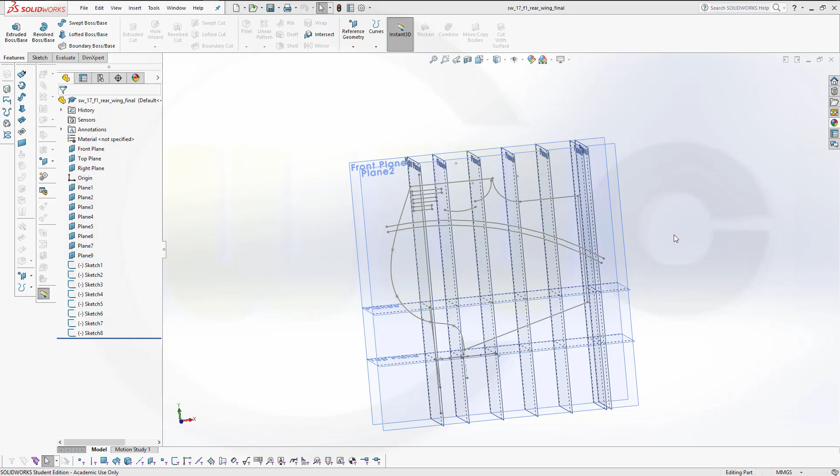Hi, welcome to the second part of the F1 rear wing exercise in SolidWorks. I've done all my sketches, so I can now proceed with the surfaces.

So let's start with an extruded surface with this. No, where's my sketch? There it is. That's the line. Maybe in this direction. 750, and the second direction maybe 200. And okay, let's trim this.

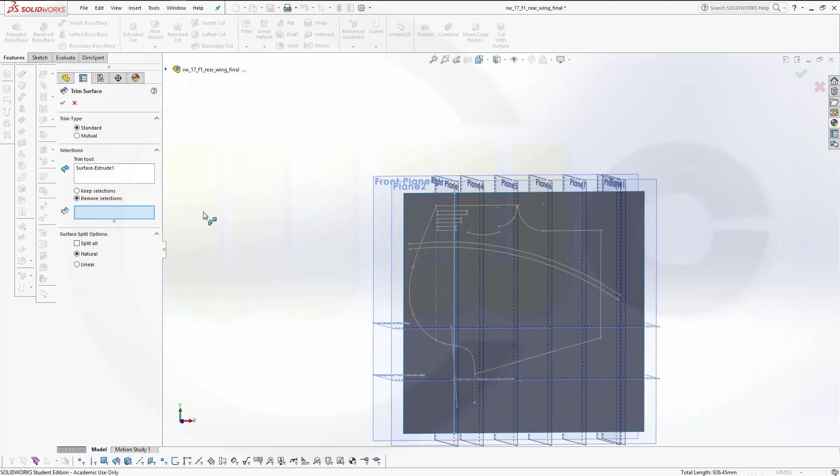So go for surface trim. I want to trim not with this one but with that line, so I will have to go for contour selection with this one, and I want to remove that part here.

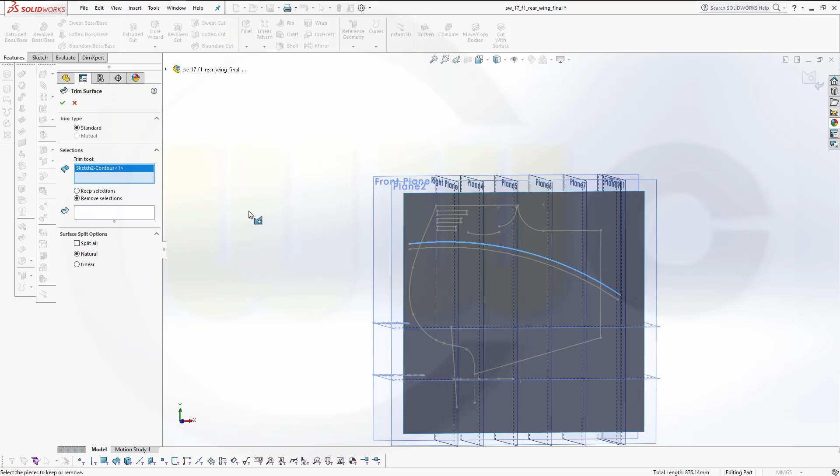So what's happening right now? Okay, let's try once more. I want to trim with that trim tool. So I go for contour selection and select this one. Okay, switch over here and remove that one.

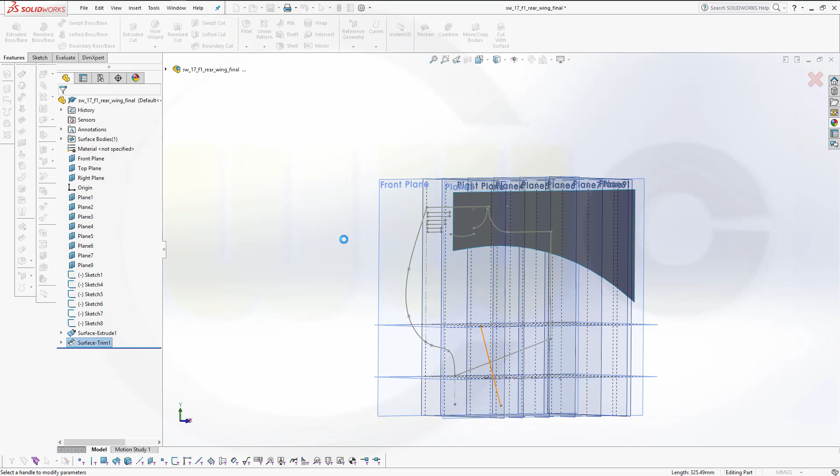Okay, next I want to extrude this. Not extend, sorry. Extrude this one. And in the second direction it should be again 200. Confirm. Nice.

Now I want to make a loft between those two surfaces. So go for a lofted one from this edge. It should go all around. So go for selection manager and make it tangent, yes, confirm, and this edge and make it tangent and tangent.

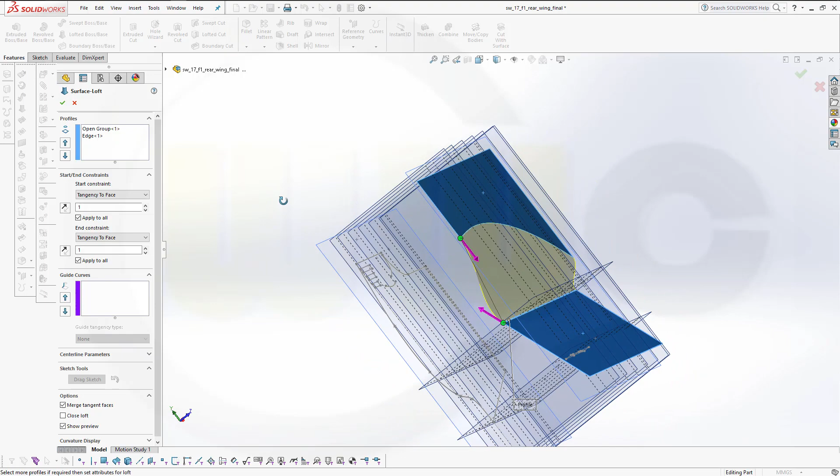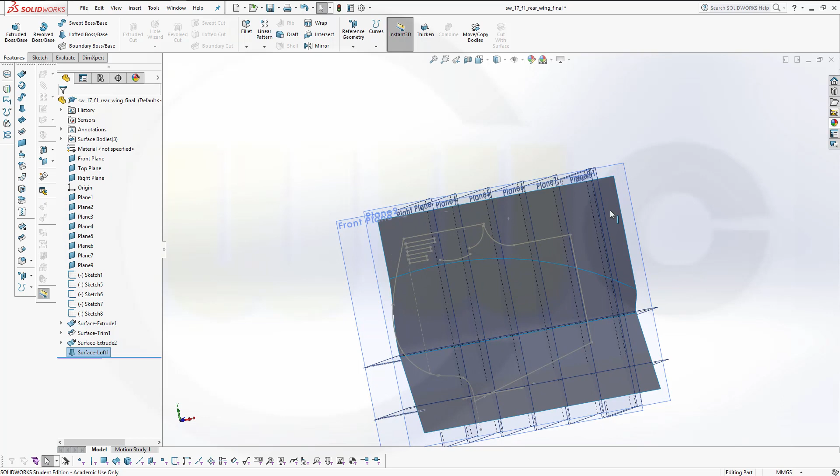And of course you could change those, but I will leave it as it is. Okay. Now let's extrude those two sketches. Extrude this one. Make it 750, that's okay. Confirm and make a linear pattern.

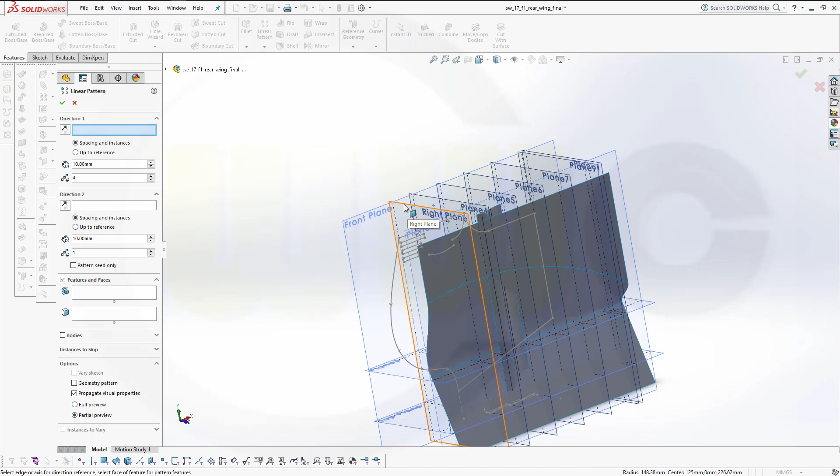Direction, if possible, with a plane, but I think that doesn't work. Let's see, maybe it works. 1, 3, 5, 4 instances, yes, and I want to pattern this one. Looks good. Confirm. Then another extruded surface with that sketch right here. Again 750. Now I can trim.

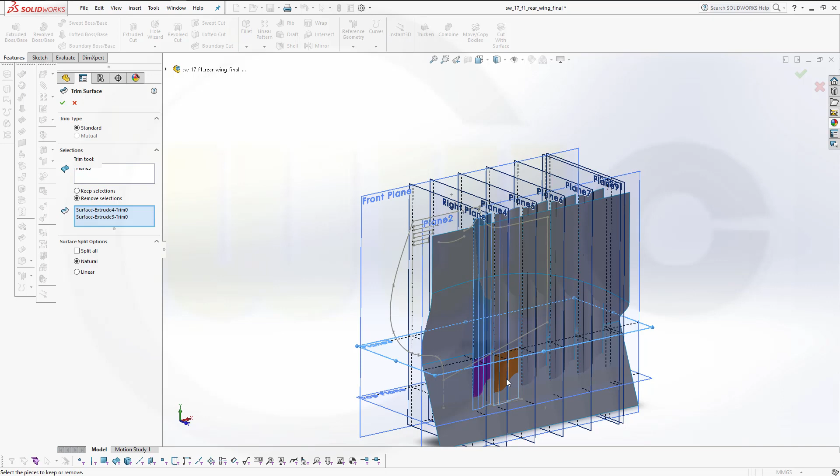I want to trim with that plane right here, and I want to remove this, that, this, that, and this. And okay. Then another trim with a sketch curve, and that would be sketch 2, which I used for the first trim. Make it visible.

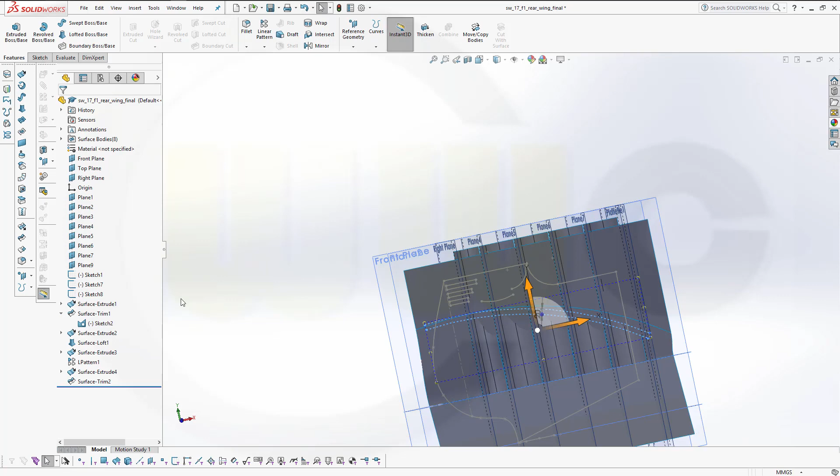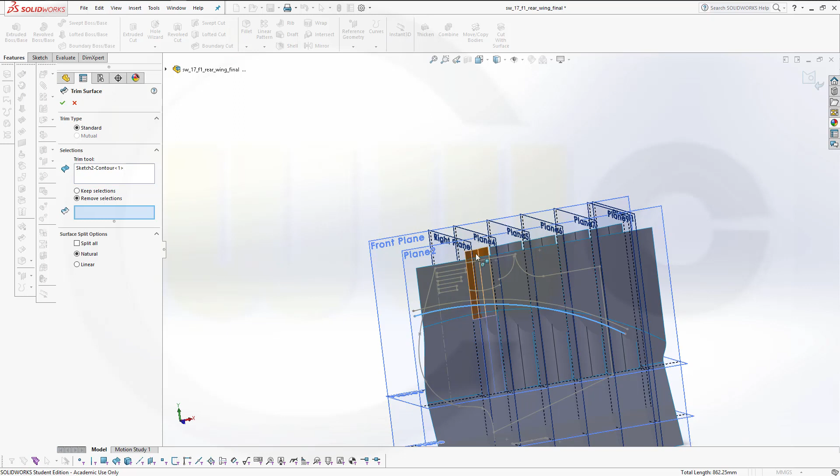And I want to trim those fins. So go for another trim. Now select contour selection, this contour, switch over here, and I want to remove this, that, this, that, and this. Okay, great.

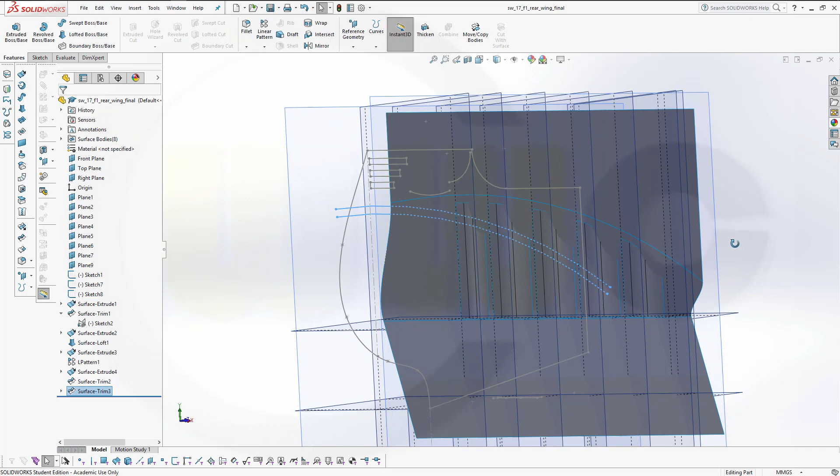Now I have to split this surface, that surface, and this one, and therefore I will need split lines. So let's go for split lines. Split line, I want to split. Let me take a look at first. No, that's with that plane, and I want to split this surface. It's not a split, it's just a line on that surface.

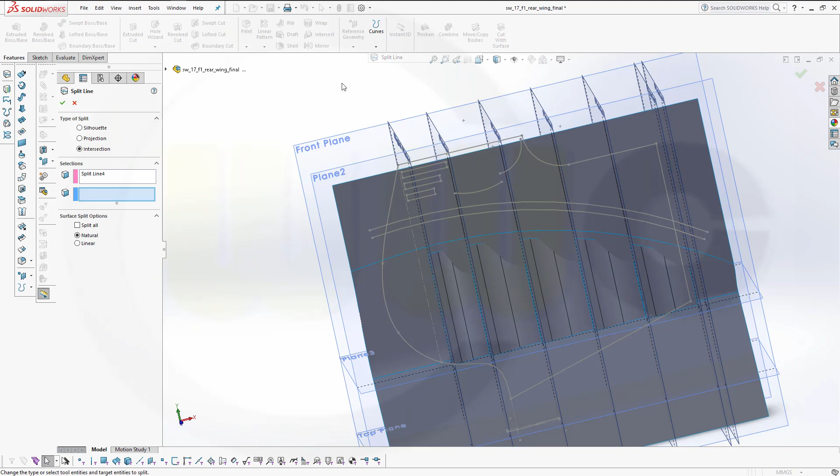Then again another split line with this plane and that remaining surface. Confirm. Another split line with this plane and that surface. Another split line with this one and that surface. And another split line with this plane and that surface. I might need some more, but for the moment I will do it with these.

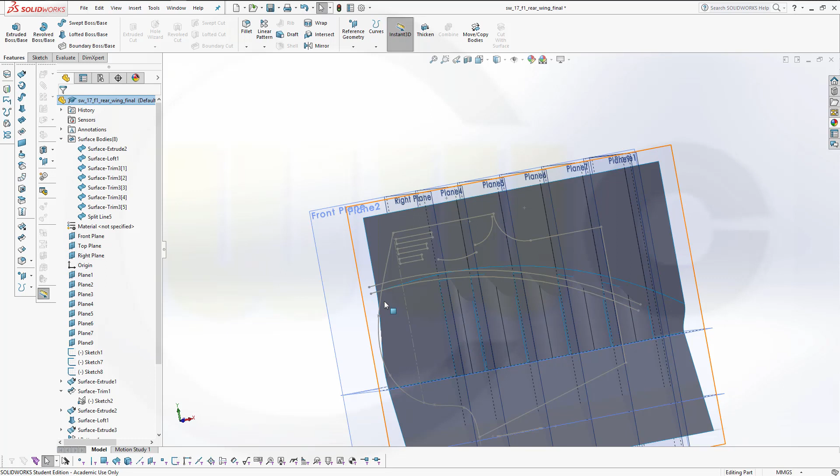So let's hide for the moment that one, and that is surface loft. That loft. I want to make lofts between these fins and that part. So go for lofted surface, go for selection manager, select that curve, make it continuous in tangency, confirm, and select that edge right here and make it tangent to face and tangent to face, confirm.

Then another lofted surface, go for selection manager, select this edge right here, make it continuous in tangency, confirm, and select that edge, make it tangent in start and end. So this didn't work. Why? Somehow I cancelled that command. Let's do it once more.

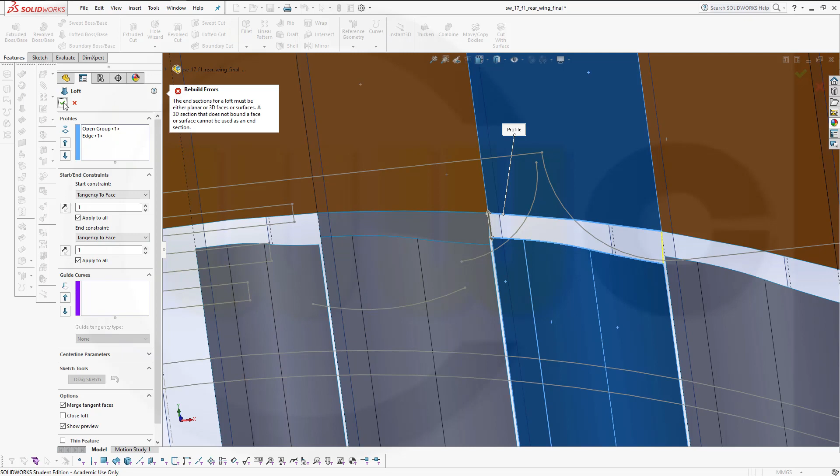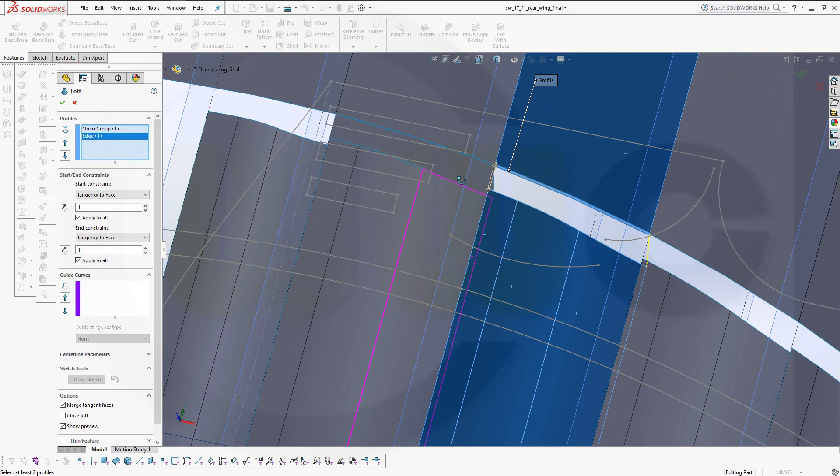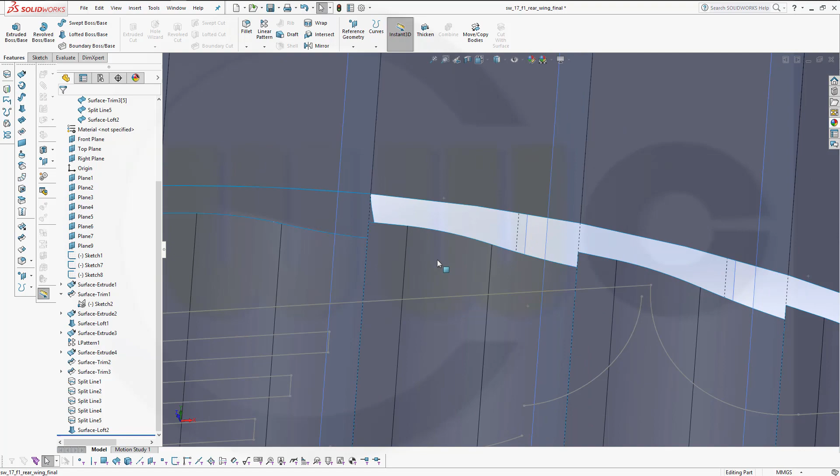Select. Maybe zoom in. This one. Tangent. Confirm. This one. Go for tangency and tangency. Confirm. So what's happening here? That's the open group. Yes. That's the edge. Yes. And seems those doesn't work. Crazy. Let's try once more.

Go for lofted surface. Let's start with that edge. Go for selection manager and select that edge and make it tangent. Confirm. This looks good. So why doesn't it work? Go for tangency to face, and go for tangency to face. Now it works. That's strange.

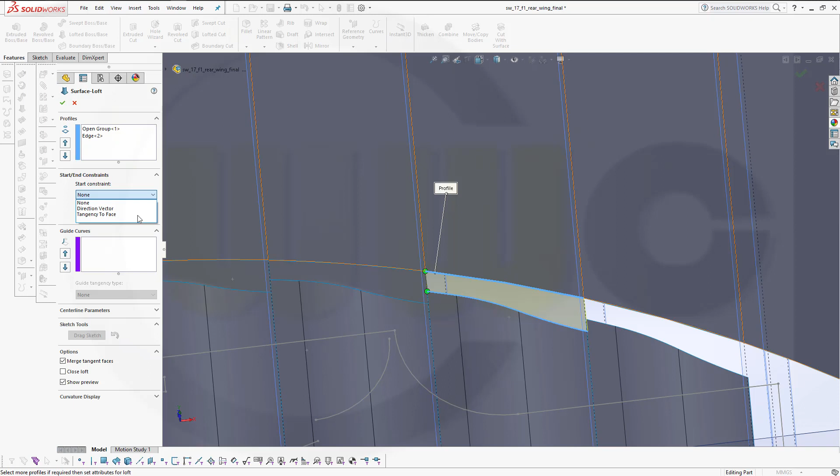Another lofted surface, edge. No, this was no good. So select selection manager, select this one, make it tangent. Okay, confirm. Then select that edge. Okay. Go for tangency to face, and confirm. Great.

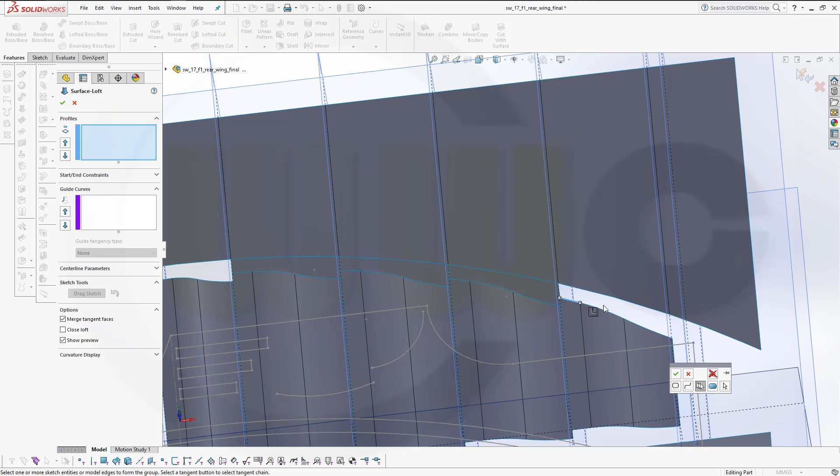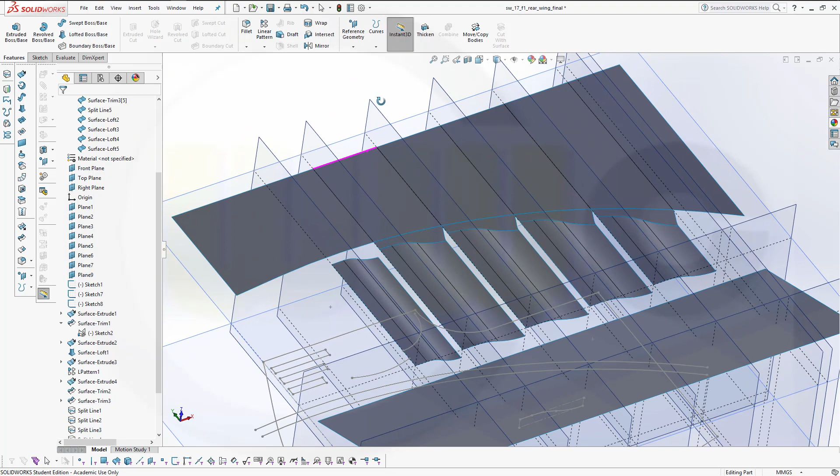Next one, selection manager. Yeah, that's really annoying. Okay, selection manager, tangent, confirm, select that edge, go for tangency and confirm. So that's okay. Now for the other parts.

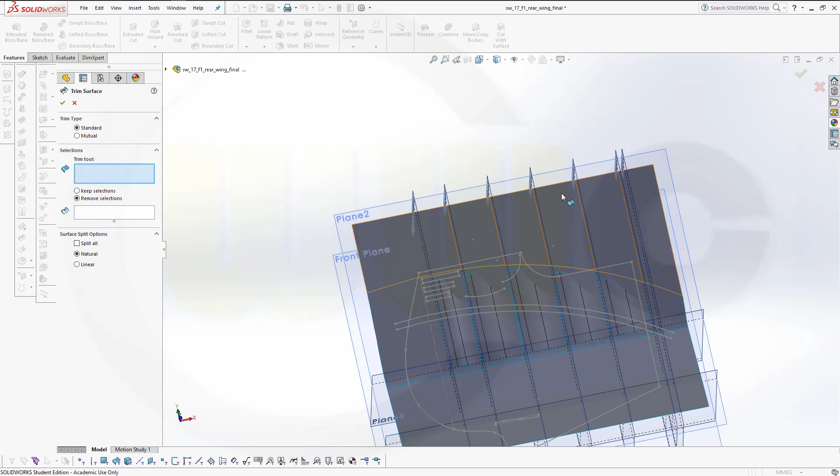So let's show that hidden surface, this one, and I want to trim it with that plane, this one. So go for surface trim. I want to trim with that plane, and I want to remove this side, and okay.

Now I want to extend this one, so go for an extension with that edge in that direction, 200mm, that's okay, and confirm. Yeah, and I want to use that curve. Can I extract that somehow with a composite curve? Would be nice. Let's try.

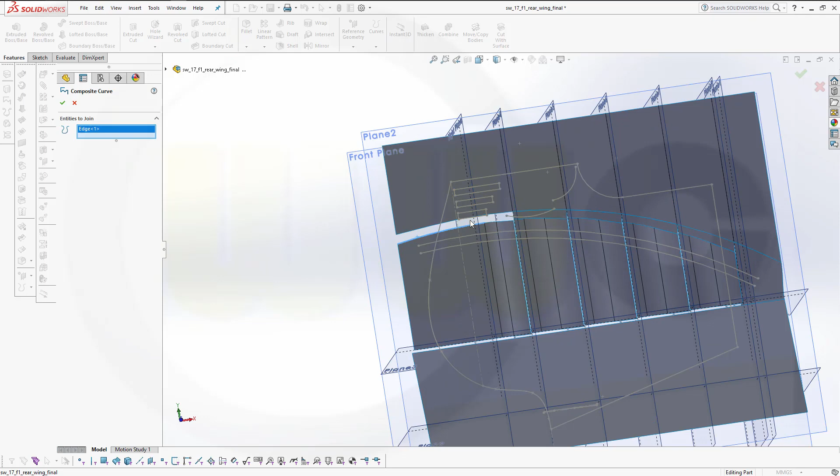Seems to be possible. Let's confirm, and we will see if we can use that for a loft. So I could hide that surface here. Yeah, and let's try to make a loft between those two. So go for a lofted surface, selection manager, and select this one and that one, confirm, and then select that curve.

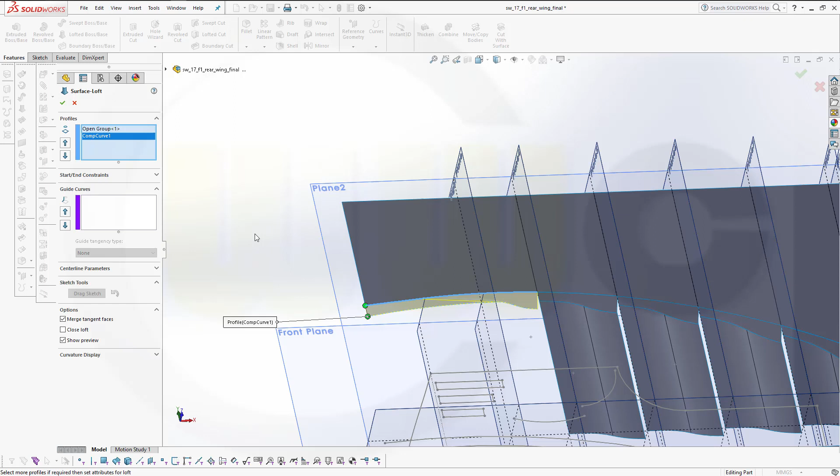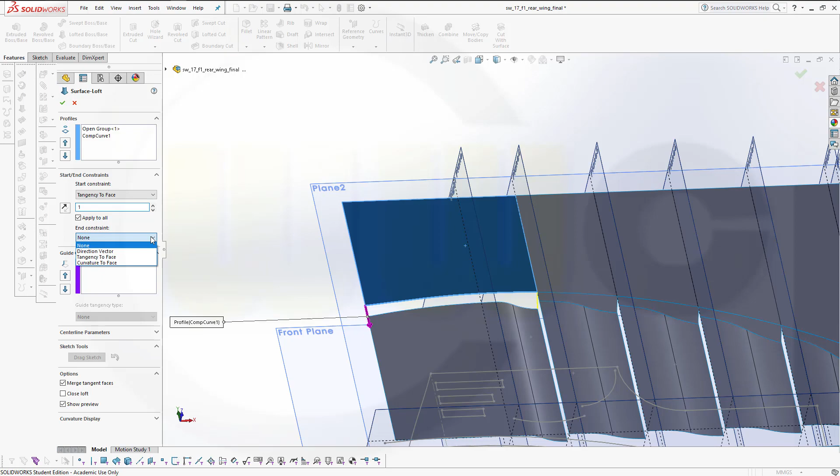That's okay, but I need it to be tangent to that hidden surface. So let's see if we can switch it back on. This one, yeah, and I need it, no sorry, need it to be tangent to face and tangent to the second one. But this doesn't look good. See, that's no good. So I might try it in a different way.

Split those two and then try to make it here. So go for a split line with that plane and that surface, and another split line between that plane and this surface. Okay, yeah, of course I forgot to switch. That's it.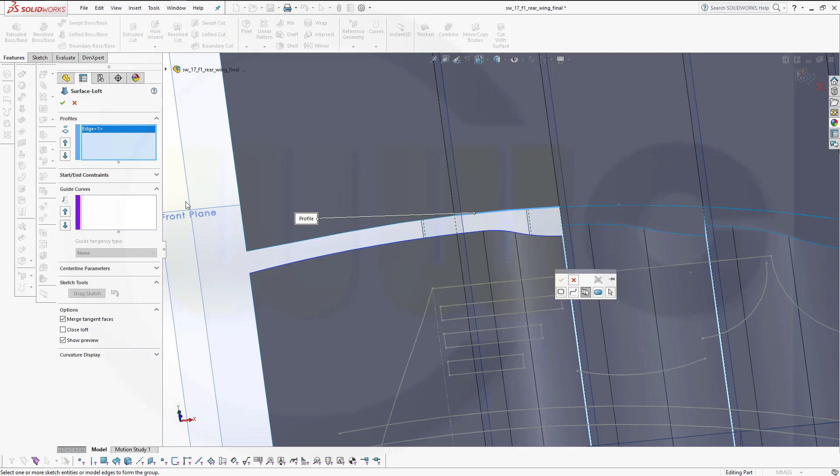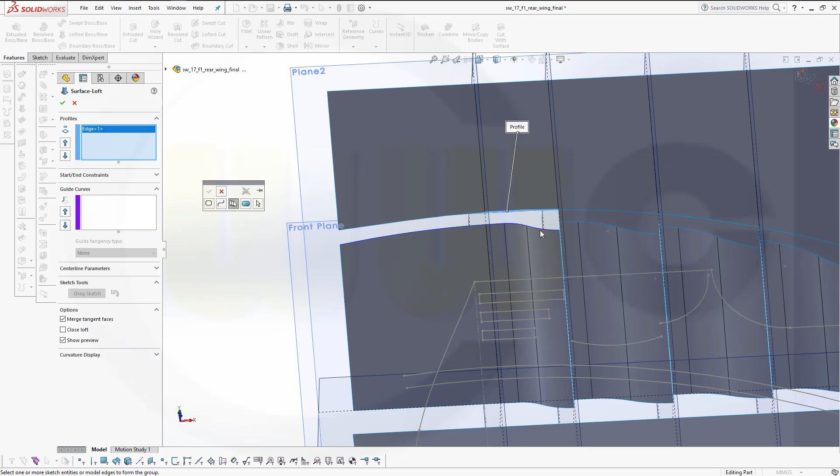Okay, let's try to make a loft here. So go for a lofted surface from this edge to... switch. So that's again somehow crazy. Okay, let's try once more. Lofted surface. I want to use this edge right here, and then go for the selection manager, and I can't select that. See, that's crazy. So try to select other. No, not possible.

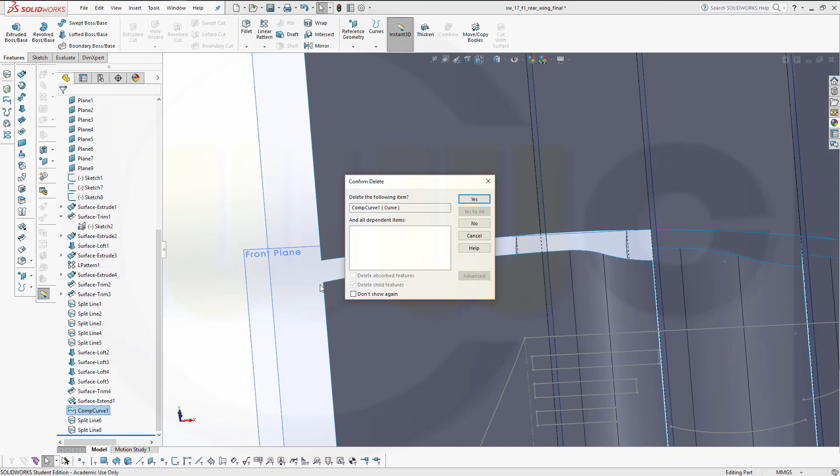This is really kind of annoying, because now that composite curve is somehow in the way, so let's delete this one. Okay, now I should be able to select it. So go for another lofted surface, select that edge, right click selection manager. Now I'm able. That's really crazy. Okay, so that's okay. Now go for start end, tangency to face and tangency to face, and confirm.

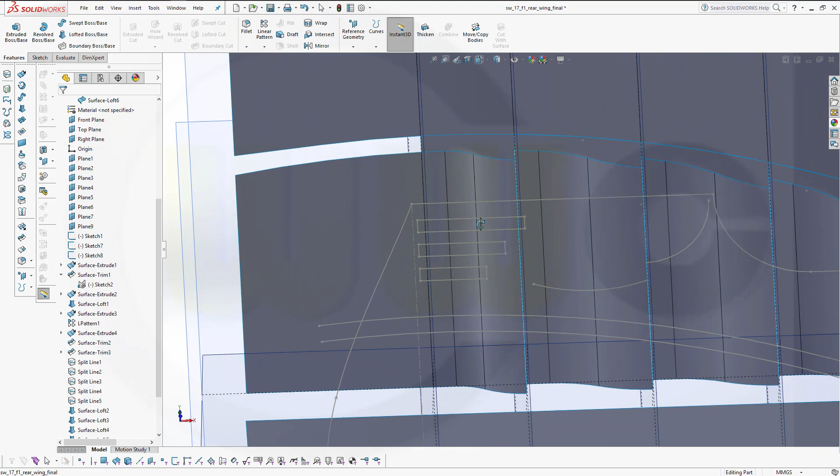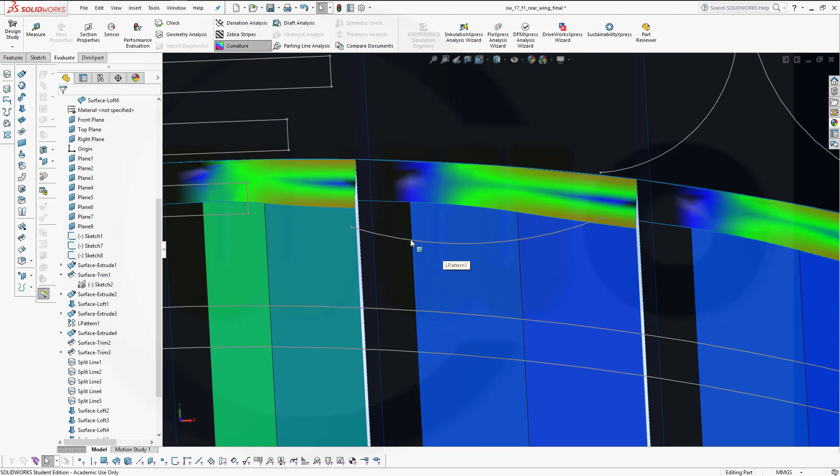Now that need not to be so. Yeah, I could do it even different. First trim and then make that loft, but this loft should be better than the one before. So let's go to evaluate and just check the curvature. So yeah, it looks very similar to those. So that's not as good as it could be, but I will leave it like that.

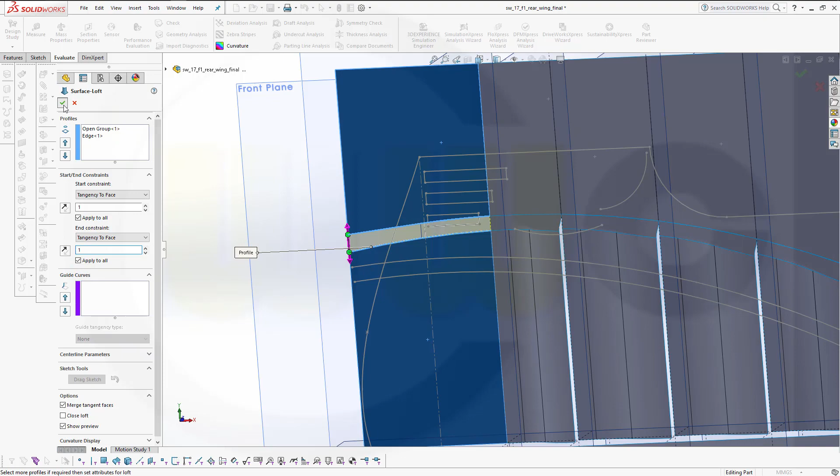Okay, now I could go for another extrude. I could trim this and I could go for a loft. It doesn't really matter, so I'll go for a lofted surface. That's faster, and I want to select that group right here, and then this edge, make it tangent. You could go for another extrude as well. Okay, so now I could knit those together and then trim.

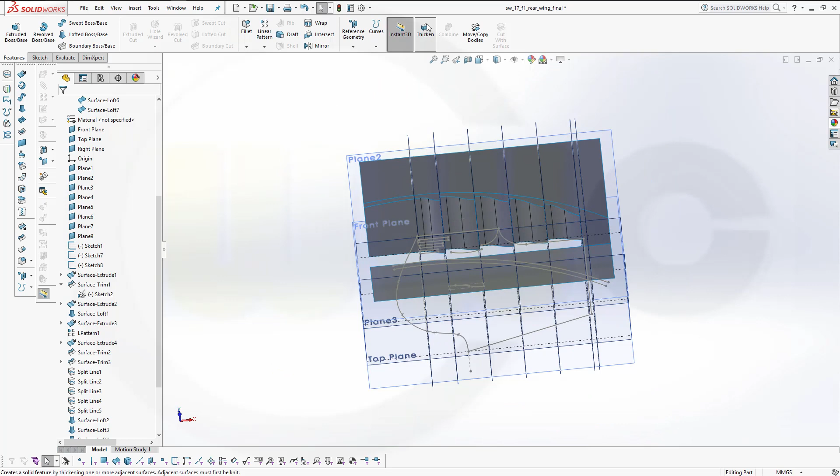There might be a problem in thickening this, so let's check some of those if we can thicken them. Let's check this surface, not this one, but that one, just to see if it's possible. 5 in both directions, possible, not? Yes, okay.

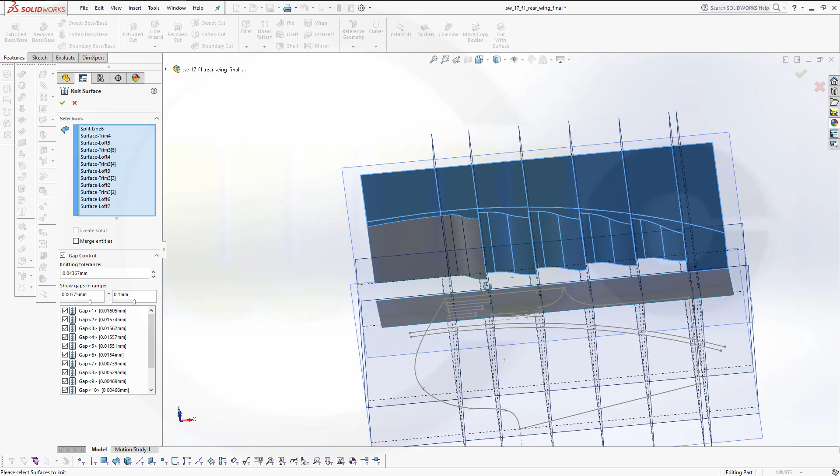And let's knit this together. So this one, that one, this one, that one, and so on, and oh, sorry. Of course, there has to be one from here over there. So let's see if we can hide that. No, we can't. So I will trim that one. So go for trim.

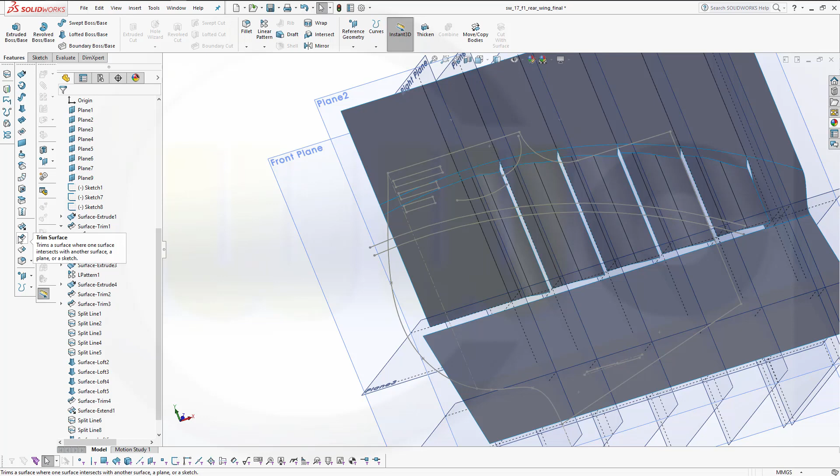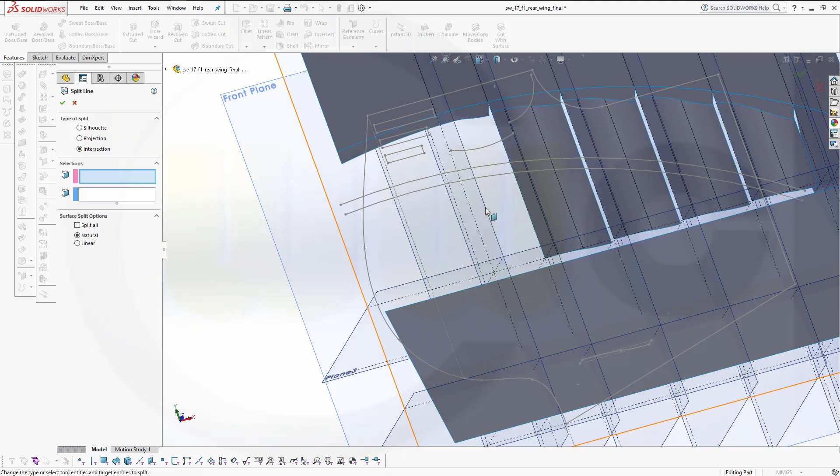Oh yeah, sorry. Sometimes I get a little bit lost. Like, now I want to have one from here up there. That's the point, from this one up to there, and then I need a split line here. So go for a split line with this one and that one. Confirm. And now I can then do a loft from that edge up to selection manager. This one like that, okay.

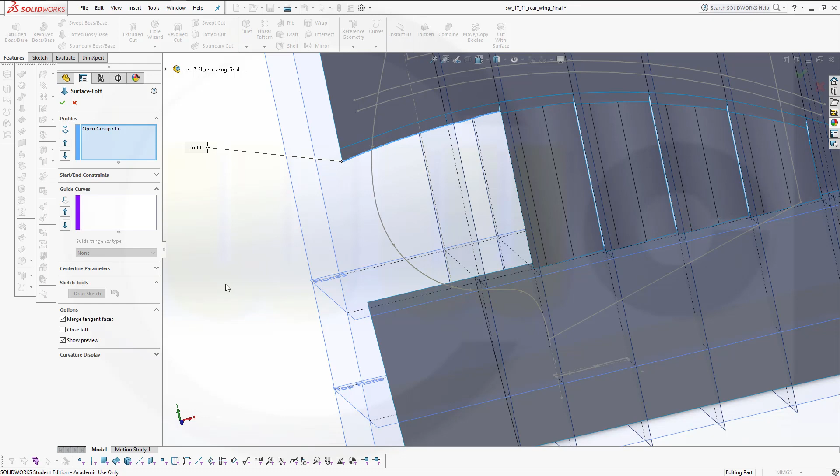And oh, that's the wrong one. It should go up here to that. So delete this and go for selection manager, this edge and that edge. No, that's the wrong one, just this one. So I think I made my split line wrong. That split line should be not this one, of course. So go for edit and change that plane and make it that plane. That's more like it. Confirm.

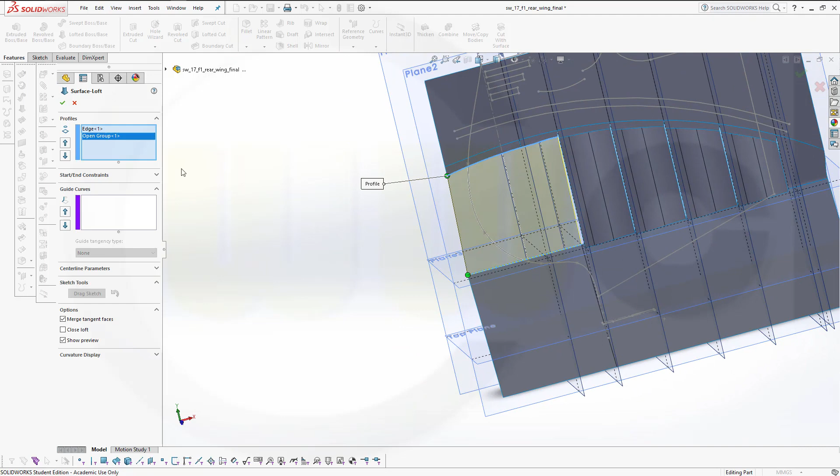And now I'm able to do that loft from this edge. Yes, selection manager up to that one. Confirm. That's more like it. Now make it tangent to both faces and confirm. Yeah.

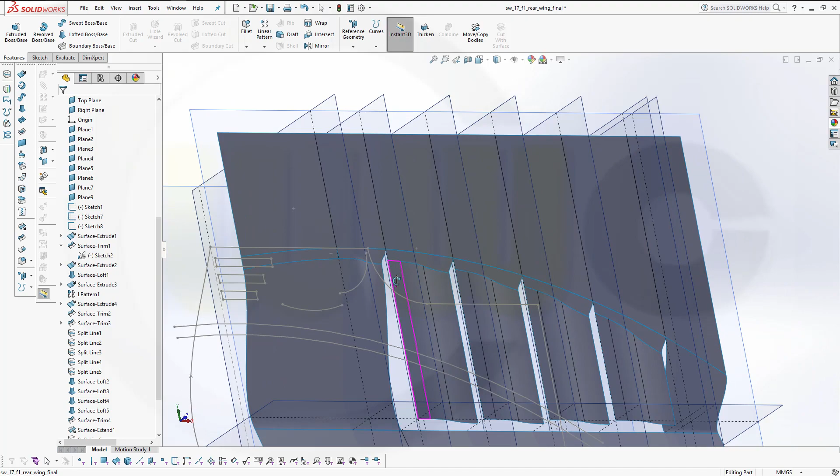Now let's knit those. Knit 1, 2, 3, 4, 5, 6, 7, 8, 9, 10, 11. This one and that one. That's it. Confirm.

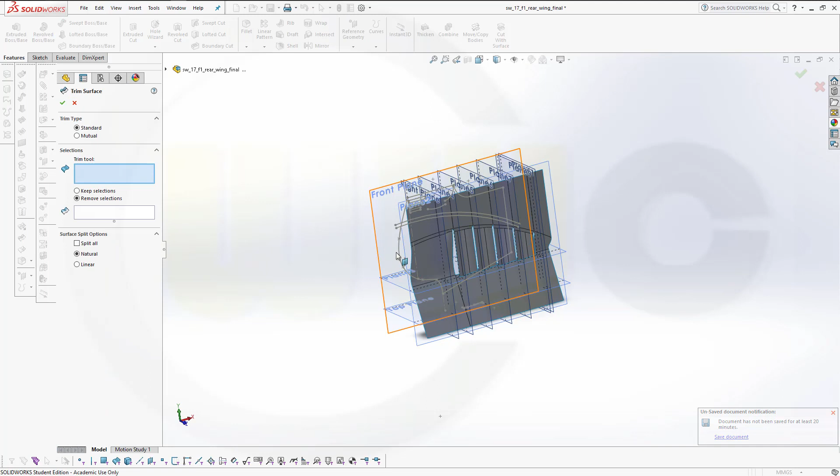Let's trim. Go for trim. I want to trim with that sketch right here, and I want to remove the face on the outside.

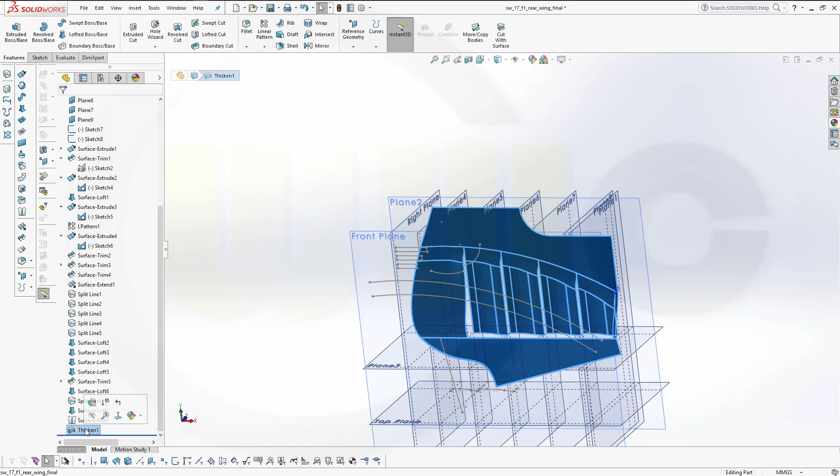So in order to thicken that surface, I had to do some changes. Now I've got a thickened surface with 4 mm, but I've changed some things. First I changed that distance. That was in sketch 2. Where is it? Sketch 2. That's the first trim here. I changed the distance to 50.

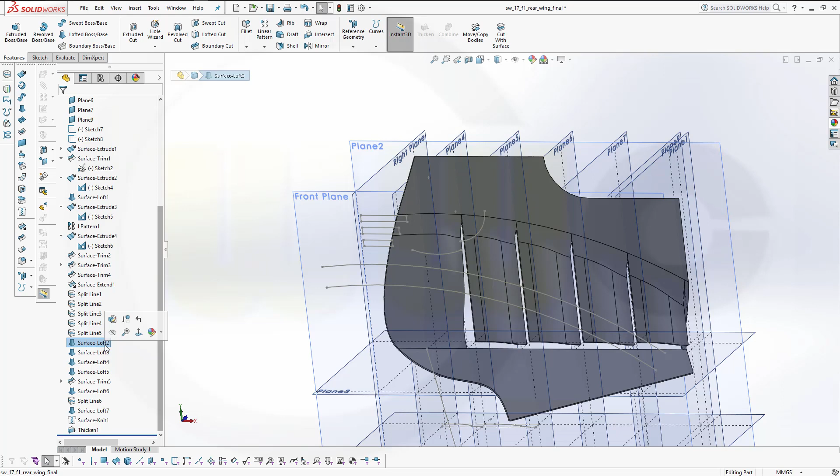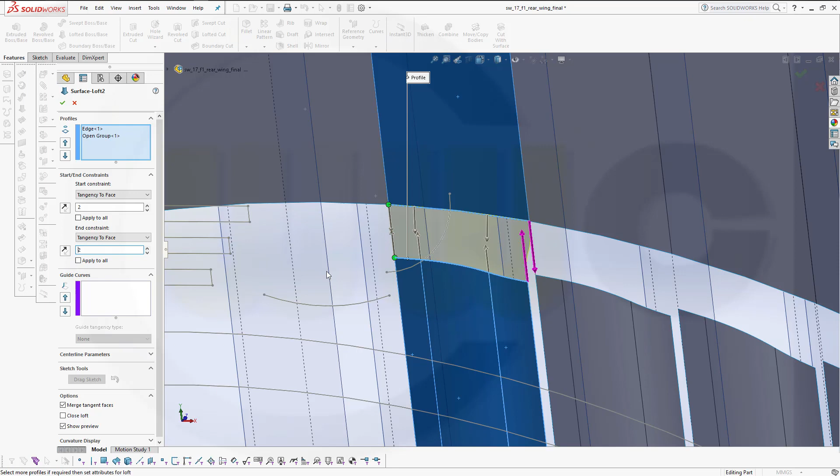And then I made some adjustments to all those lofts here. I will show it with the first one. I disabled apply to all, and then you're able to edit that tension at 4 points, and I changed it here at this end to 2, and for this one as well to 2, and I did all those changes identical here, here and there, and I've also changed the tension here and there, and then I'm able to thicken it with 4 mm thickness.

So let's move on. Now I want to make extruded surfaces with this one, and this should go up to that plane. Confirm. Then the next one

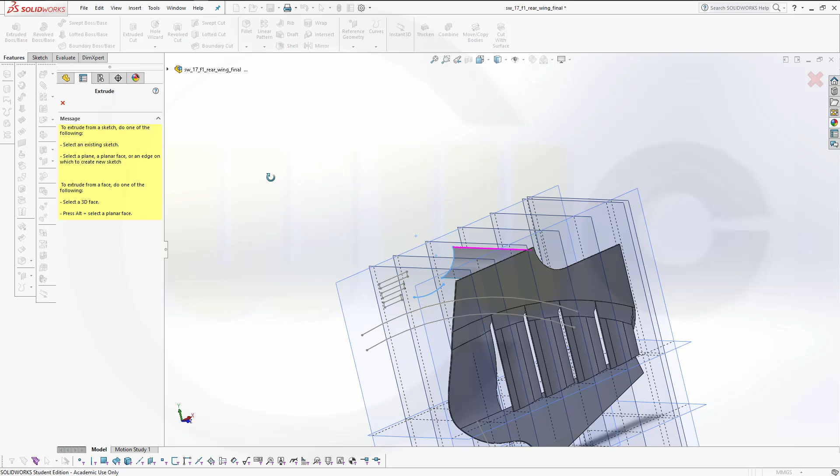with this arc again up to the surface, in this case a plane. Confirm. Then I can thicken that, thicken this one with 4 mm.

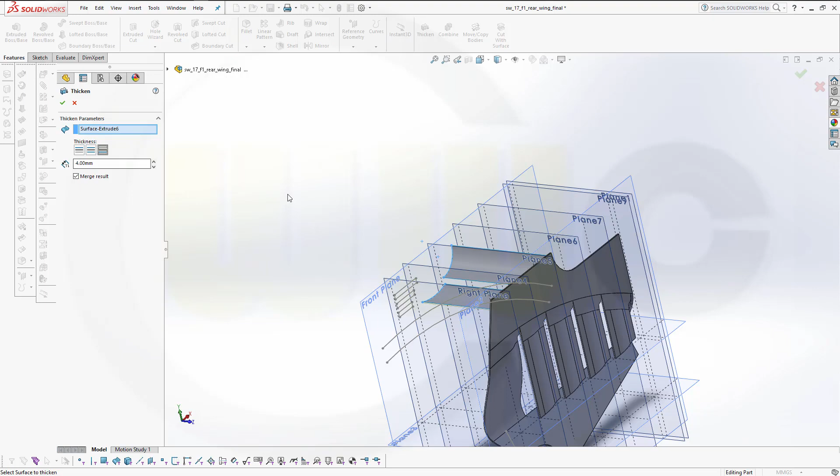So I've selected the wrong one. I want to thicken this surface right here, so go for thicken this one, okay, and 4 mm in that direction, that's okay. Then thicken that one again, great.

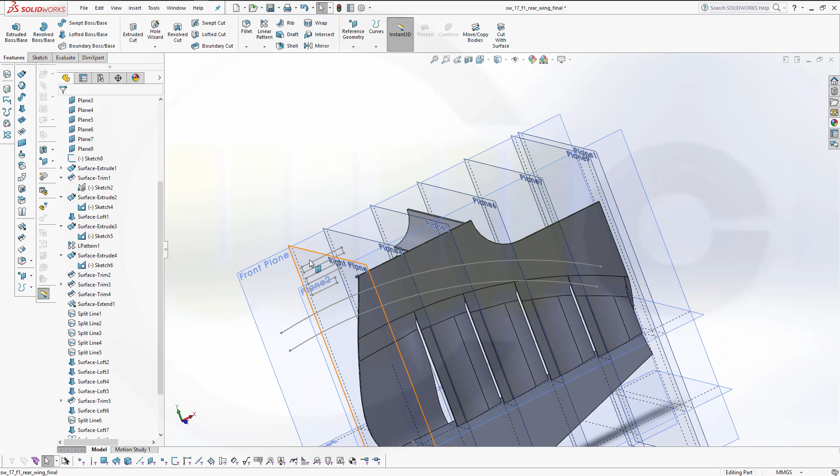Then I want to cut these holes into that surface. So let's go for, that would be an extruded cut with that sketch. So with this sketch in that direction, the other direction, and it should go up to that plane.

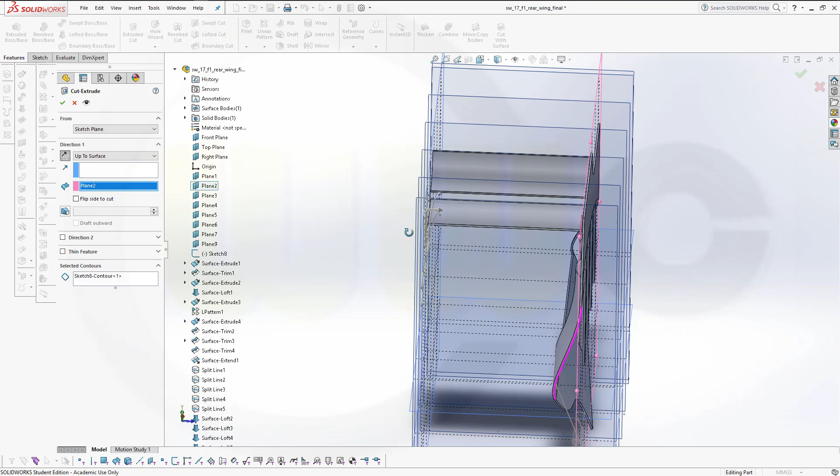Okay, so that didn't work. Let's check, is this on? It's on the other side, that's the problem. Okay, I see. So I have to go a little bit more than that plane.

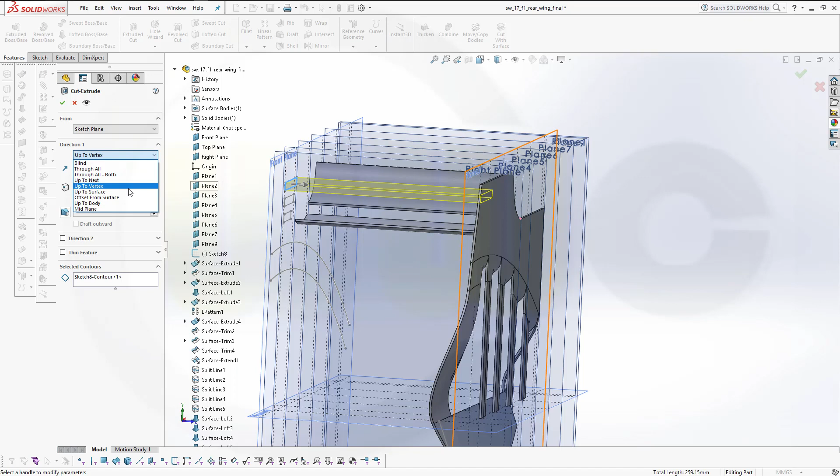So go for an extruded cut with that profile in this direction and make it, let's say, up to or through all. Confirm. Another extruded cut.

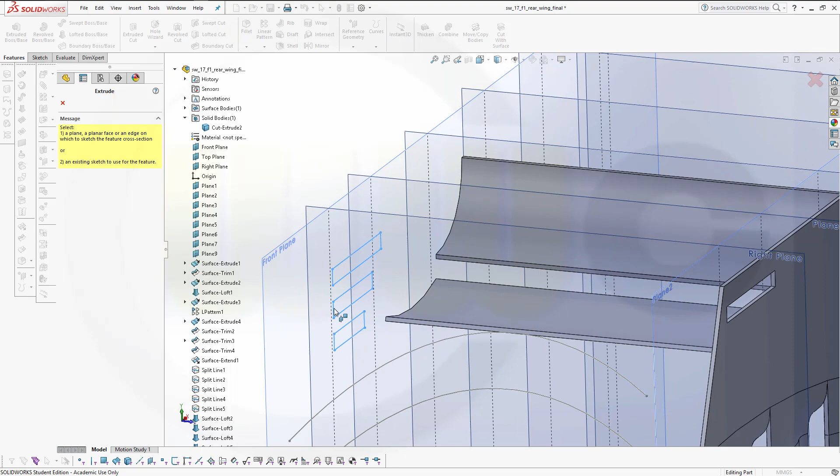This one. I'm not able to select it because, let's see if we can go for select other. No, it's really kind of hard, so make it visible. This one. Okay, now I should be able to select it, extruded cut with that one.

Again, flip the side, make it through all, confirm, and another one with this profile, flip through all, confirm.

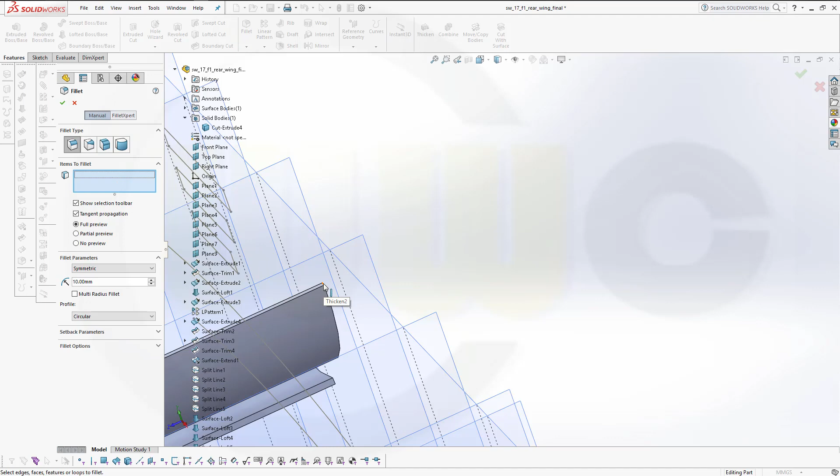Now I want to add here a fillet, so go for fillet, let's say 40 on this edge right here, make it 40. Yep, confirm.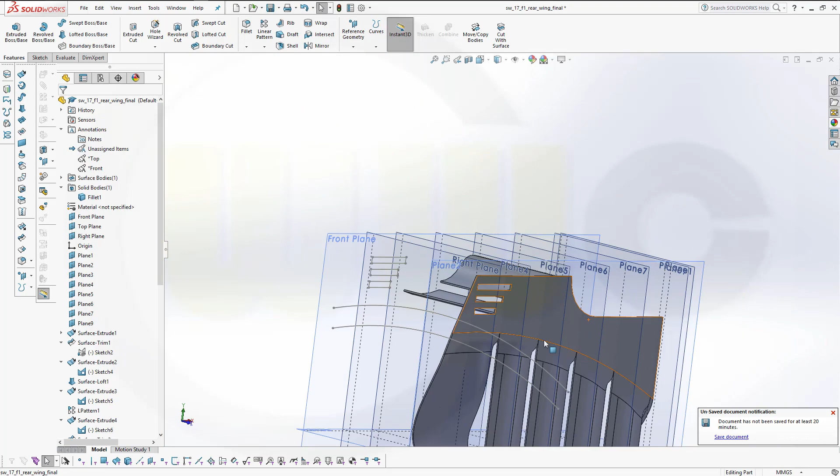Now let's add some chamfers here, so go for chamfer with 2 lengths, that's 2 lengths, distance, yes, and I want it to be not symmetric, it should be 5 and 10. Let's see.

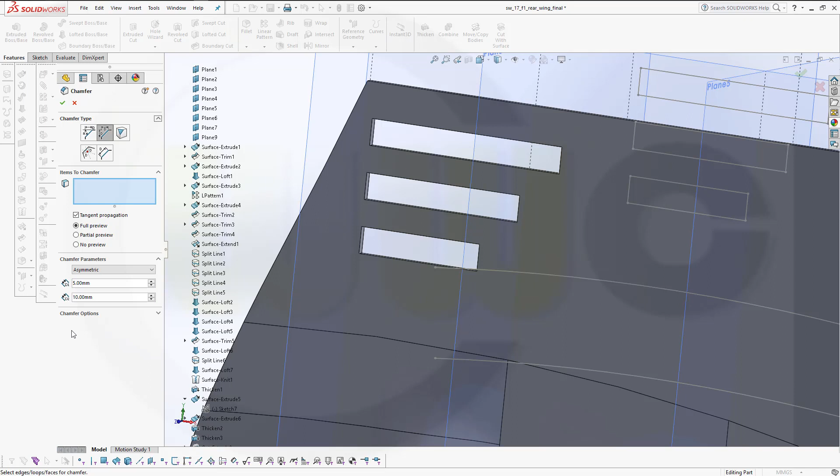Let's try to do all of them together. Confirm. Great. Then the next one.

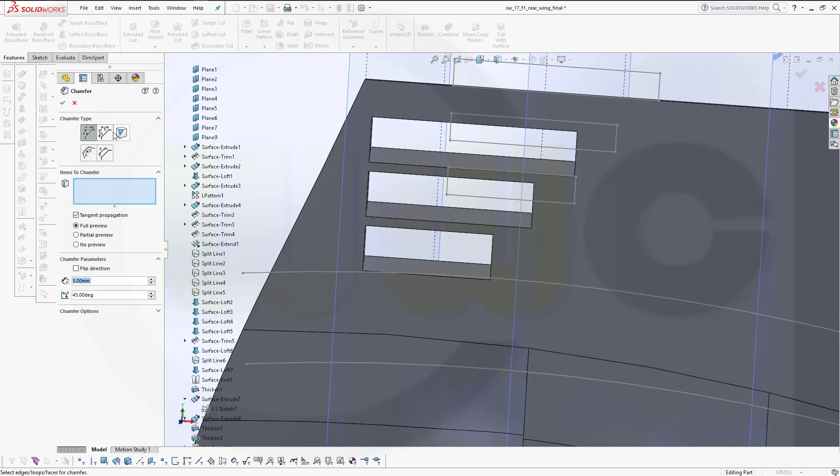Again, asymmetric. Now I want to use this edge. Let's see if that works. Yeah.

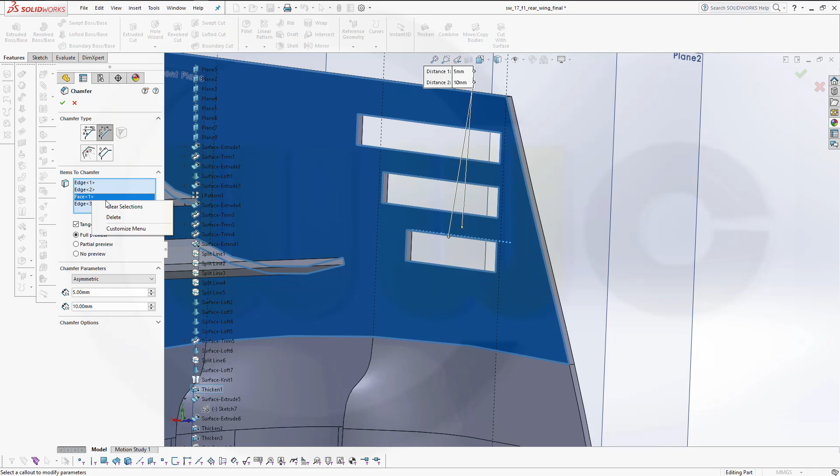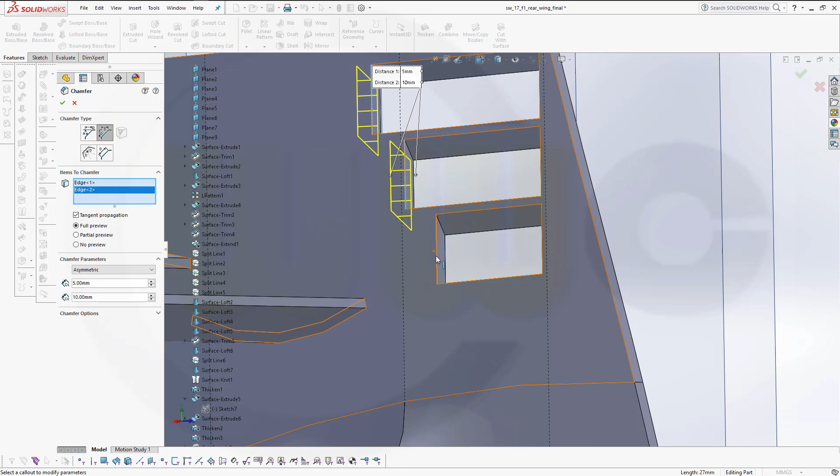and same distance on this edge. That one and this one. Confirm. Now some fillets.

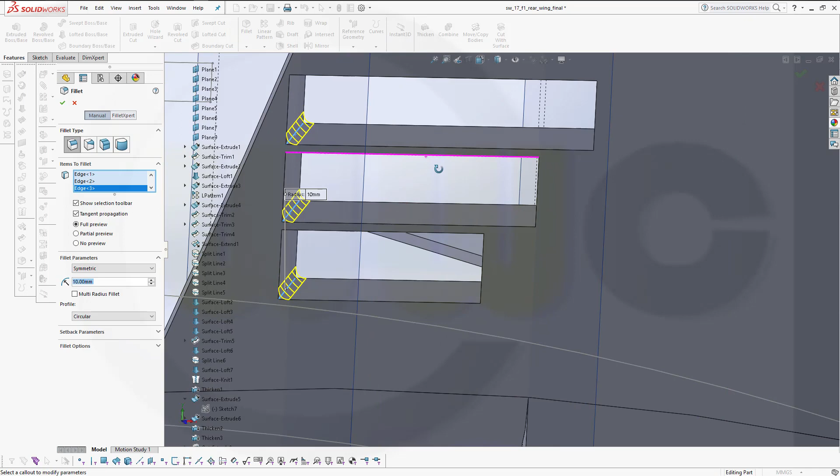Maybe 10, let's see here, this edge, that one, and this one. And let's see if we can do that at the same time. No, that will not work. So clear that, delete this one, but I could try to fillet this one, that one, and this one.

Okay, then another fillet with, let's say, 5 on this edge here. Oh, that's too big, so go for 1.

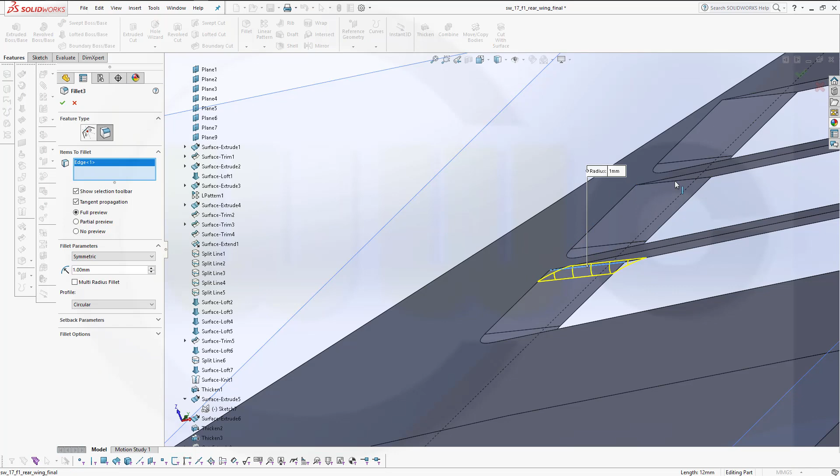Let's try this one. Yeah, this works. So edit that one and add this edge right here, that edge, and there should be another one. Yeah, this edge, that edge, and of course this one. Confirm. Nice.

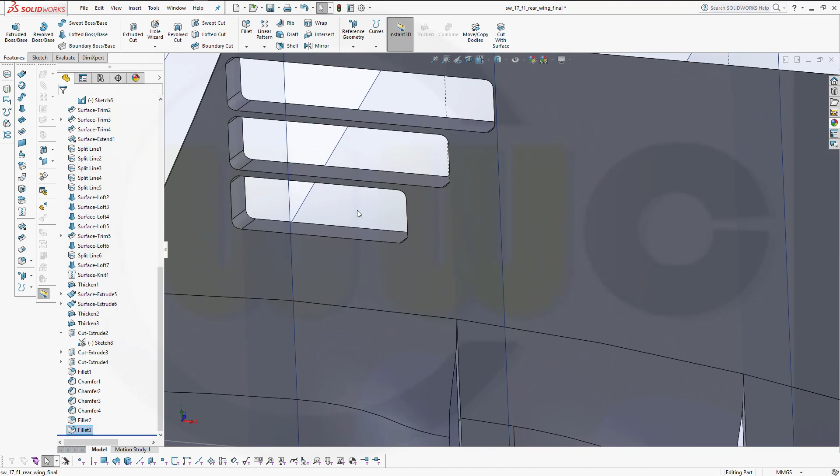Now let's mirror this. I could hide those planes. Yeah, I need the, so hide those planes. Okay, and maybe hide the sketches as well.

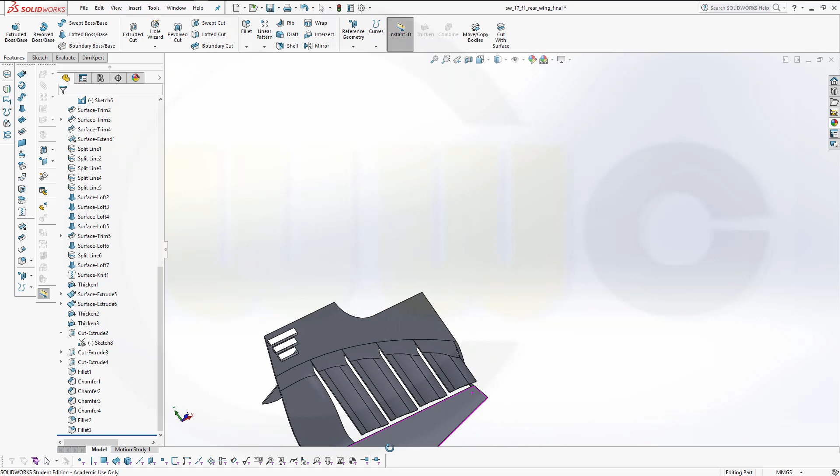Okay, so now let's mirror that body. Mirror body, that body, and the mirror face/plane would be the front plane. Confirm. Great.

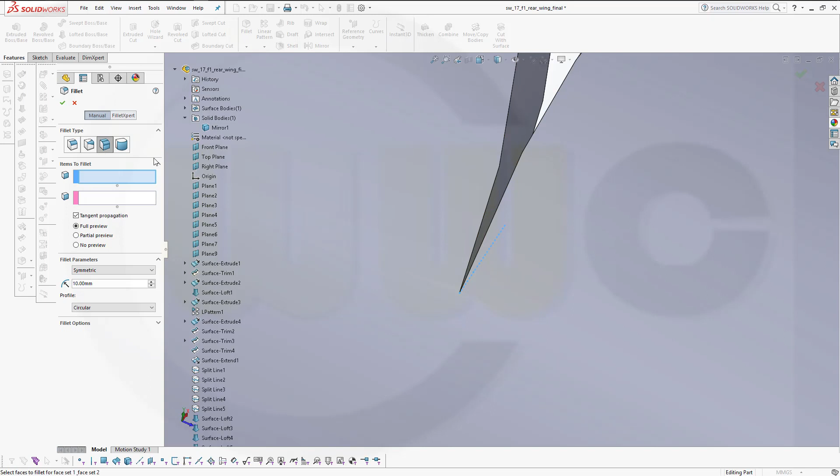And now I need another last fillet on this edge, so go for a fillet, make it 10, and try to select that edge right there. That's the one. Or you could go for a face fillet. Let's go for a face fillet. That's easier to do. This fillet side and that side. And confirm. And I think I'm done.